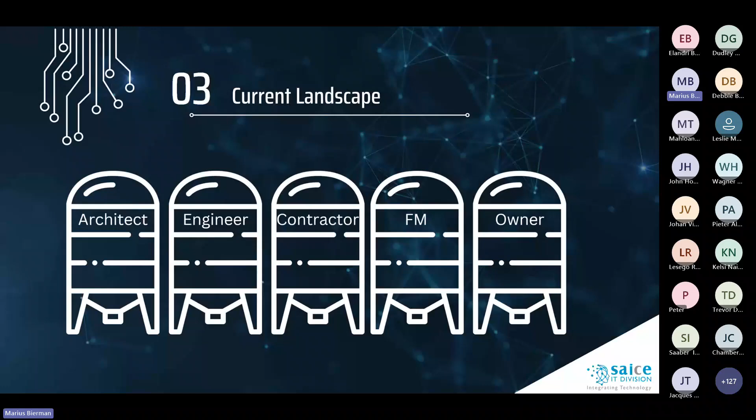So now we've set the scene for where we come from. We understand that there are tools available. We also know that we operate in the industry in silos and collaboration is a problem. But let's have a look at some of the tools and technologies that are available to us as an industry and should really consider investigating and utilizing.

So just from the top: building information modeling, reality capture technologies, construction simulation, virtual reality and augmented reality tools, digital twins, and artificial intelligence. So let's first have a look at building information modeling.

There are so many different terms to describe what is BIM, but for this presentation we will rely on the ISO definition, where it states the use of a shared digital representation of a built object. I need to stress this, it's anything that we build - bridges, houses, roads, water treatment plants, doesn't really matter - to facilitate design, construction, and operation processes, to form a reliable basis for decisions.

So BIM goes beyond mere 3D designs. It's a digital representation of the physical and fundamental characteristics of a facility, evolving from basic modeling to encompassing aspects like time, cost, and sustainability.

I might just add that in terms of building information modeling, the term building is slightly misleading, and the industry is moving more towards adopting a term called digital project delivery, because building information modeling originated in the building industry, focusing on the building aspects. So when we say BIM, rather consider it being called digital project delivery.

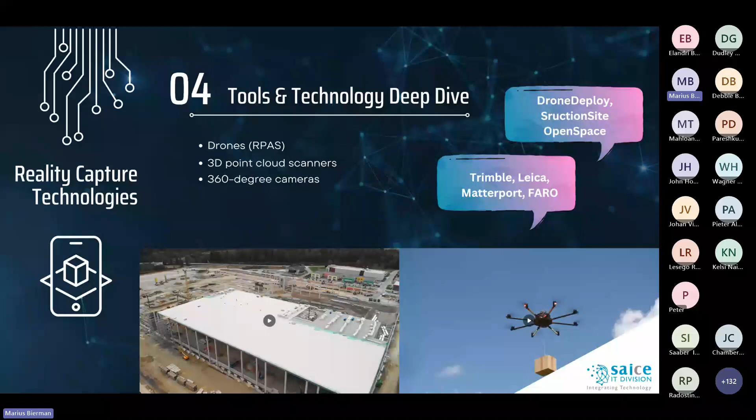We've got the design, the model, and reality capture data. Without the preceding information, construction simulations would not be possible. The civil engineering and construction industry stands on the cusp of a digital revolution, and at the heart of this transformation is construction simulations.

By leveraging 3D models, data from reality capture devices, and advanced collaboration platforms, construction simulations are redefining the benchmark for precision, efficiency, and synergy in the industry. Let's look at the interplay between the different elements to understand how they foster unparalleled collaboration.

Again, we mentioned 3D modeling. If we didn't have the 3D model, building information modeling, or digital project delivery as it's also called, it would not be possible.

3D modeling tools allow for creation of detailed and accurate design representations of the proposed infrastructure. These digital representations serve as a virtual prototype, aiding in design validation, feasibility studies, pre-construction analysis, and also during construction. There are multiple scenarios you can run, and I'll show you an example now. One benefit is dynamic adjustments.

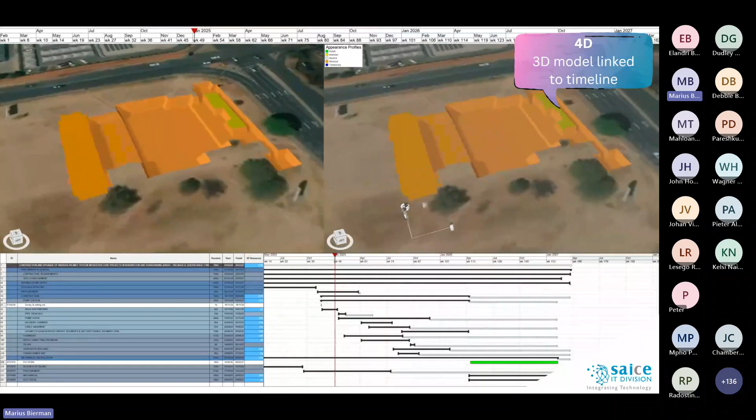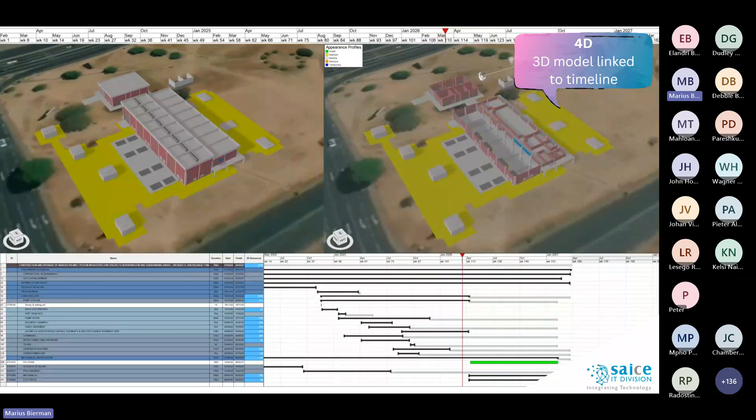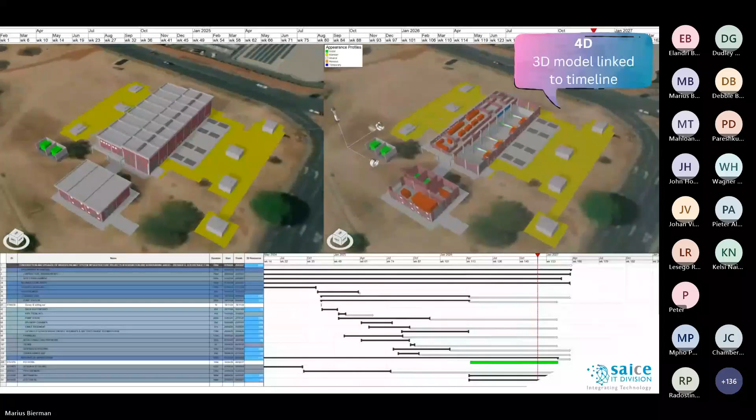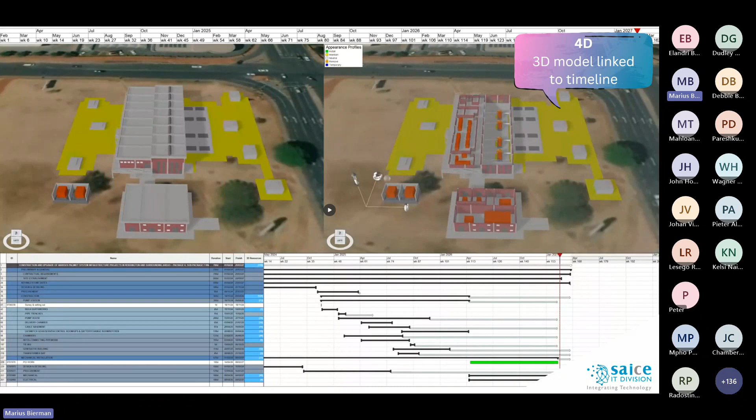Construction simulation enriches the 3D modeling and reality capture data, and housed within advanced collaborative platforms, these are the lighthouse guiding the industry towards a future of shared visions and unified efforts. As these technologies continue to evolve and become more integrated, the boundaries of what can be achieved in civil engineering and construction will expand, setting new standards for excellence, efficiency, and what this industry can really do.

Okay, let's move to the next. Why isn't it moving? Here we go.

Okay, so the last few topics I'm not going to delve too deep into because each one of these areas has got its own nuances and ways that you implement it. So let's take it from the whole process. We've got the 3D model. We've got the common data environment that everybody has got access to.

We've got the 4D simulation now, seeing your timelines. You have reality capture that you've done, whether it's drones or 3D scan. What you then can do is funnel all this information and have an immersive digital experience on the site. So the fusion of virtual reality...

Sorry, just missed something there. Give me a second. So, immersive digital environment - interactive 3D models. Virtual reality allows us to take the 3D model, all the interactive information, and have a physical walkthrough. So this is a way to identify issues in design or construction, or queries or issues that need to be resolved.

So with VR headsets, team members from across the globe - well, if you are working globally, because a lot of the consulting firms have global partners - can simultaneously inspect a virtual construction site. The shared experience, irrespective of geographic location, ensures a unified vision and understanding of the project details.

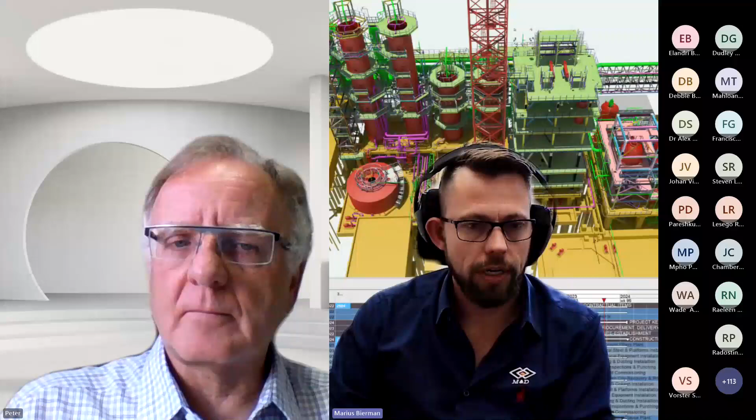Clients just blindly saying, yes, we want to implement BIM - you need to understand what you want, and that's where the BIM execution plan comes in. What are the deliverables? How do we operate? What do we want to get out of it? So that's a very, very interesting question.

Thank you for that answer, Marius. There's a comment from an unknown user saying they work in a BIM task team at Sanral - it's a starting point for them as an agency of the Department of Transport. In my brief time researching ISO 19650, BIM seems often to be very closely aligned to DTs, whereas BIM is a means of communicating, not software. Seems Marius is nailing it. Okay, so there you go, Marius. I'm glad I'm not leading them astray, so that's good.

Yes, that's excellent. I'm just going to switch back to the Q&A just to see if we've got any more in there. I think there's a comment here from Johan.

It's very interesting indeed, Marius, and especially the 3D model linked to timeline program. I was exposed to the 3D model during the construction of Medupi Power Station, and drones were used at certain GPS points with data captured by a specialist team. The 3D model was quite helpful inside the boiler rooms where all the pipe and structural fittings could be visualized, with discussion around progress and matters resolved in the boardroom. This works quite great in structural projects and would be great to have on a road construction project. So a bit of feedback from someone who's actually also started to integrate this technology.